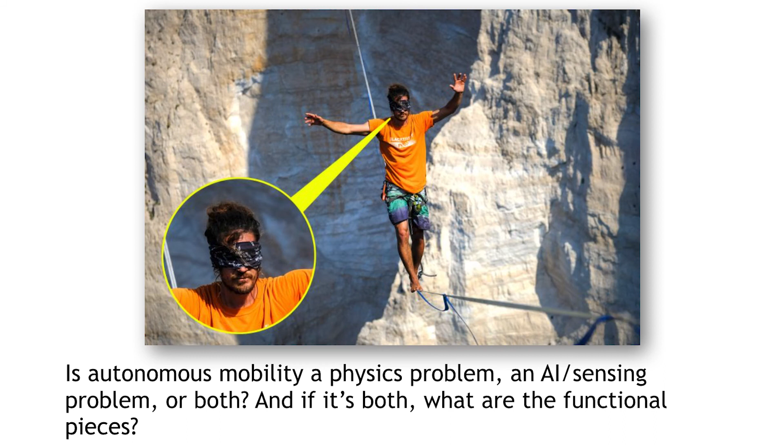If you think about this system though—this gentleman has wisely decided it would be good to blindfold himself before slacklining across this canyon, and has taken the interesting step of removing sensing from the equation other than proprioception. Clearly, you can do very complex locomotion tasks like this without having a perfect map of the world, because you can blindfold yourself and intentionally delete the information. So that kind of asks the question: are high-level cognition and mobility separate problems? And as any good talk has, there's no actual answer here, but I want to talk through some of the issues.

On the other hand, if you have a world-class athlete like Edwin Moses, who won a number of track and field meets back in the early 80s, back to back to back, that's not really a separate problem. You can't imagine a case where an Olympic-class hurdler is really able to remove the cognition and planning from the mobility of the manipulation side.

And there obviously is a spectrum here. So you can have machines that are more on the pick-and-place end that have very little in the way of active AI, or systems that are purely AI-based.

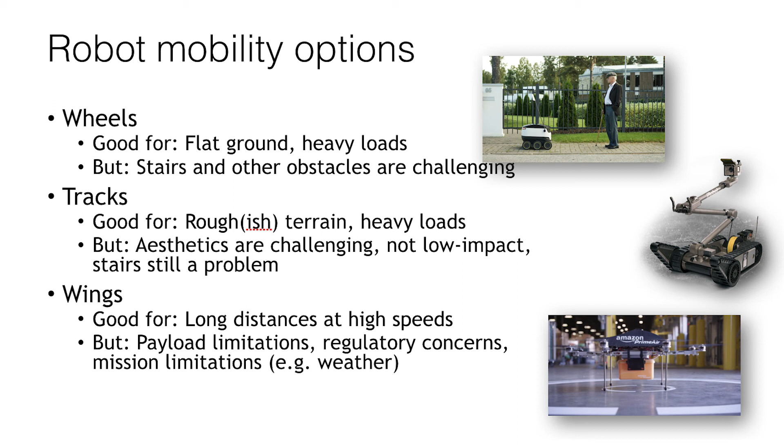In terms of legs, legs in general are very good for human environments. As a consequence of us having legs as much as anything else, I'm sure if we had evolved with wheels, our environments would be good for wheels too. So people have asked us, well, why bipeds? And the answer is, well, there's obviously a spectrum here too of the number of legs that you can have. So RHex, which is a fairly well-known early legged machine, had 6 legs, had the nice feature of being statically stable.

Where it starts to fall apart a little is in a paradigm where you're interacting with people. If you imagine a package delivery task at a business where the expectation is the package ends up on the counter, you end up having to add additional manipulators onto the back of it—like the arm that Spot Mini has, in order to reach the counter. Whereas with a biped form factor, you end up with the manipulators at approximately hip height for a human.

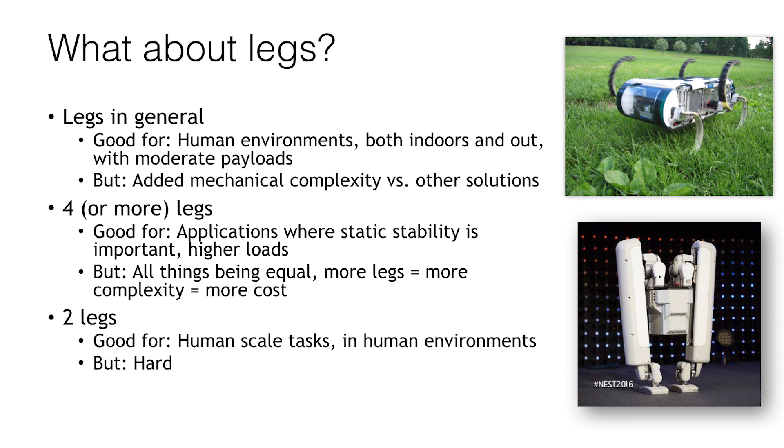I'm not trying to point fingers and say this is a terrible way of doing it. The idea that you would directly actuate each joint in the robot is an intuitively relevant approach. So the idea is, if you look at people, you can identify all the degrees of freedom on someone's arm and leg, put motors in each spot, and then control it.

If you had a magic actuator, that would work fine. The problem, when you address the physics of this, is that as you place mass distally—either on your arms or your legs—you end up with big pieces of inertia waving around along with the limbs. If you're trying to do low-cost educational robotics that's not particularly dynamic, and instead trying to give you active control over all the degrees of freedom of the robot—fully actuated as opposed to under-actuated or over-actuated—then that's an appropriate choice.

The problem is, as you start to get into dynamics, it would be a lot like having the car engine out there spinning around with the wheel of your car. It's a huge waste of inertia—you have to accelerate and decelerate it as you do the movement.

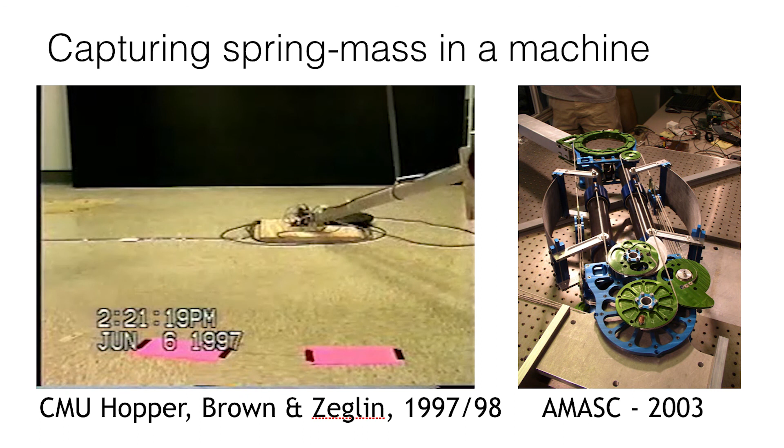Lots of people over the years have tried to capture spring mass motion in a machine. This was work that Ben Brown and Garth Zeglin did at Carnegie Mellon in the 90s, called the CMU bow leg hopper. Videos of that are available on YouTube.

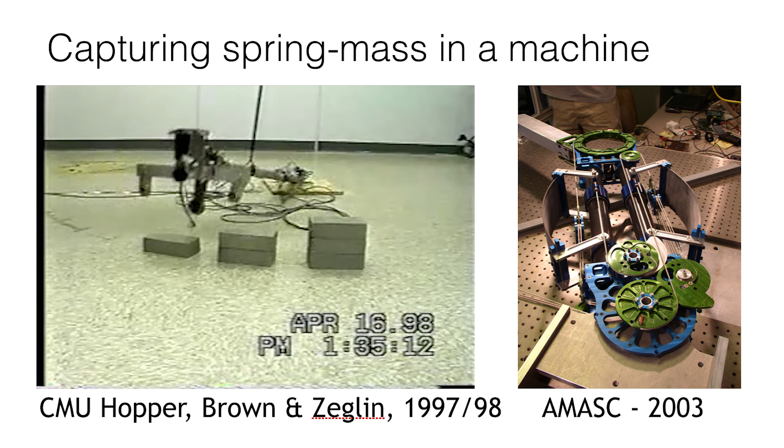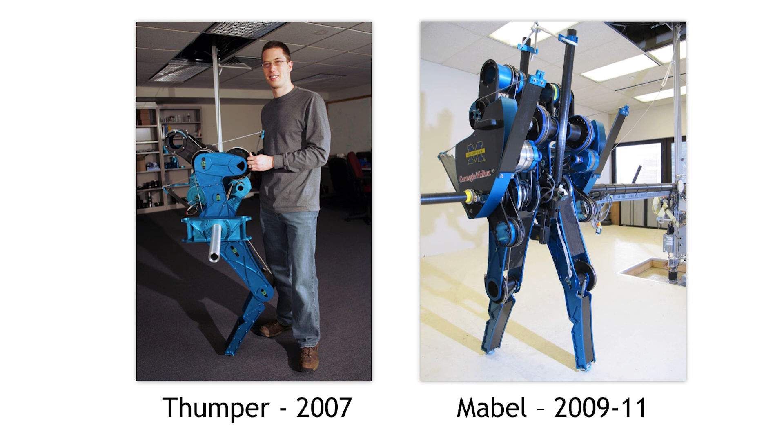This was the initial origins of the Cassie robot. This was Thumper and Mabel. You may be familiar with the Mabel robot from University of Michigan. Thumper was essentially one half of a Mabel.

There was an NSF project that built 3 legs. 2 of them were combined together to form Mabel, and then one of them was Thumper.

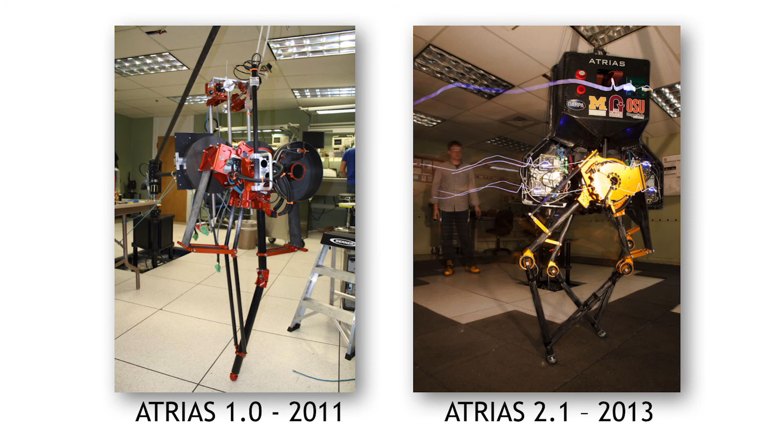That evolved into ATRIAS 1.0, work that was done at Oregon State University. That was up to ATRIAS 2.1 by 2013. There were 3 copies of this: one at Oregon State, one at University of Michigan, and one at Carnegie Mellon.

That was Jesse Grizzle at University of Michigan and Hartmut Geyer at CMU.

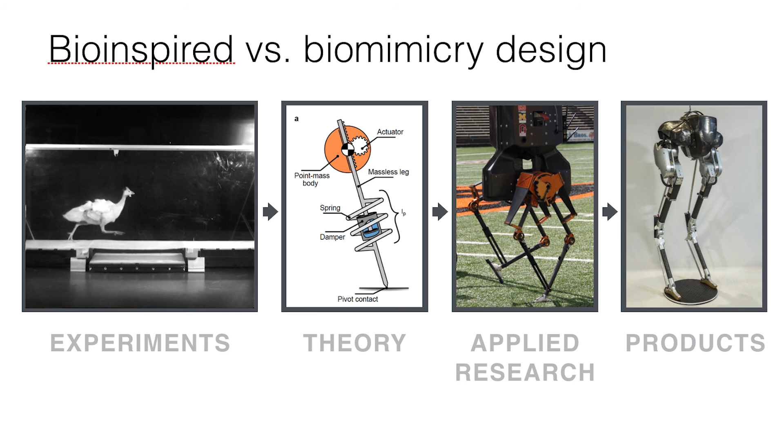Now this gets into the topic I alluded to, which is: are we intentionally trying to make machines that look like the animals? In this case, no. The starting point here is, of course, animal experiments, because that's our best reference for bipedal locomotion. That goes into a math model, which turns into an engineering project, in this case the ATRIAS project, and is then turned further into a commercial product, which is Cassie.

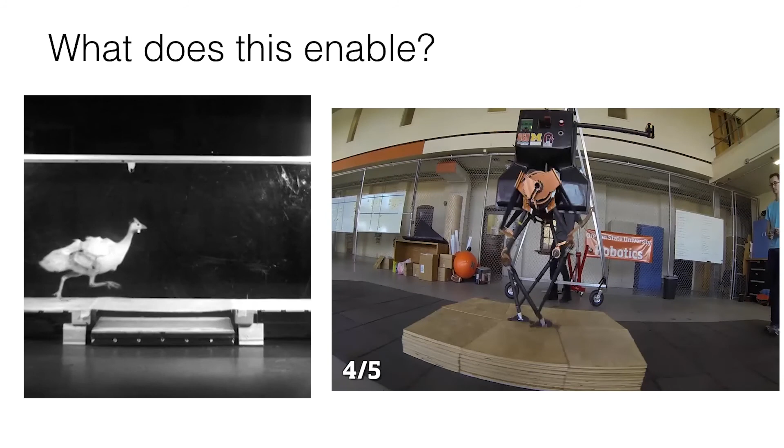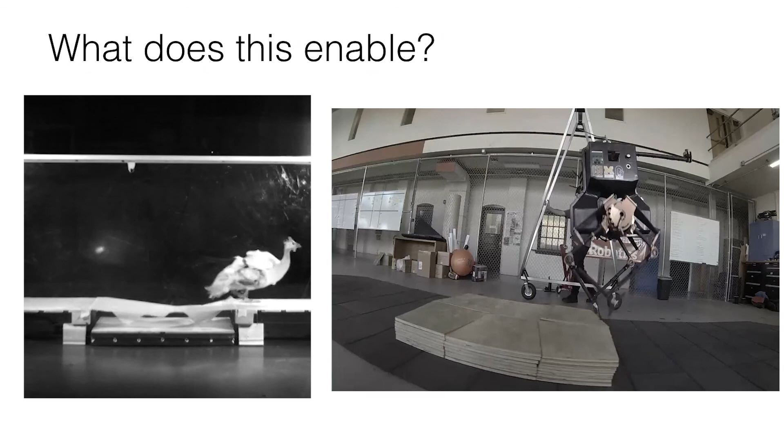This enables a couple of things. If you compare these two videos side by side, the bird on the left-hand side has no idea that it's running down a runway and is about to hit a piece of tissue paper. It was trained to run down a runway while being chased by a grad student. And what it's doing here is punching through the tissue paper.

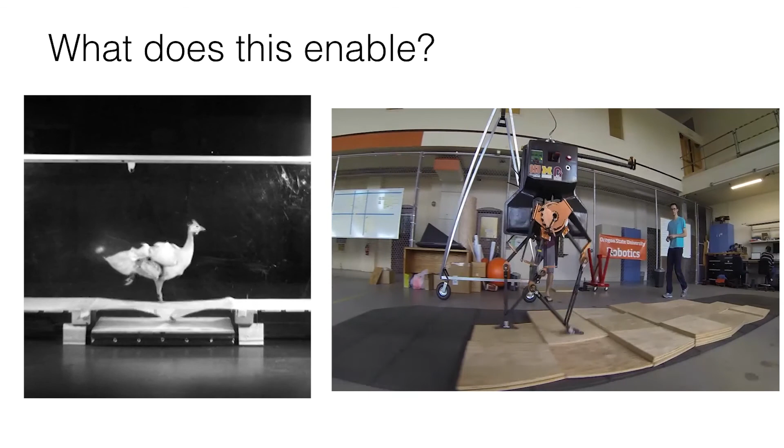If you actually look at the neural response time in biology, there is no active control that's fast enough to catch that leg behavior. So what's going on here is primarily a physics problem that's kind of baked into the hardware of the robot on the right-hand side, or the bird on the left-hand side.

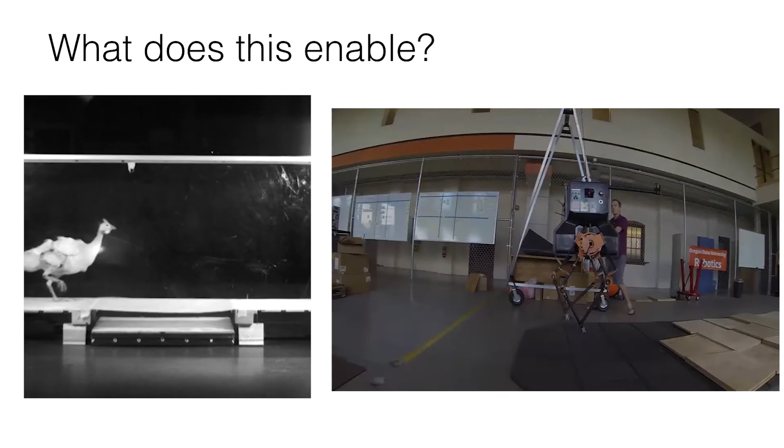And ATRIAS exhibited very similar behavior.

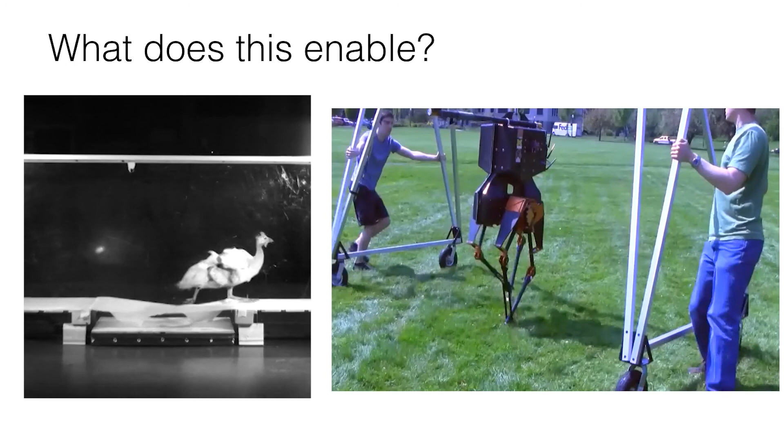This version of ATRIAS here had no sensing on it at all. It was unaware that it was walking, in this case outside or on those steps, and was able to sort of stumble and recover based on the physics of the gait, as opposed to 3D scanning the environment, having a plan of where it was going to place its feet, and so on.

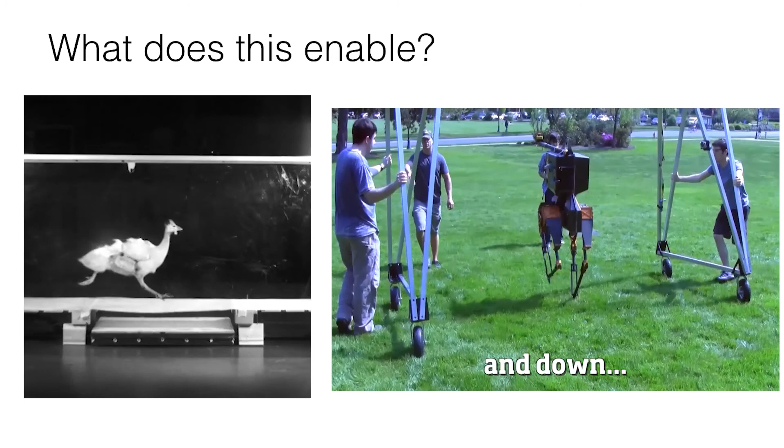So that suggests that, qualitatively, because we can see similar behavior here between the bird and the robot, maybe we're heading in the right track in terms of what portion of this is software defined and which portion is mechanical defined.

The problem here, though, if you think about this from a product standpoint, which is what we're interested in as a company, is that ATRIAS was pretty far from our product. It had no ability to get up after a fall and would frequently tear itself to pieces when it fell sideways, with actuators coming out the side and a very heavy upper torso. It took a lot of engineering work just to keep the machine alive, much less have it be a useful product.

So in 2014, this is sort of where I first got involved in the early stages of what became Agility. The university proposed a design concept for DARPA that they were calling at the time Silent Runner, and this evolved into Cassie in about a year and a half after the beginning of the project.

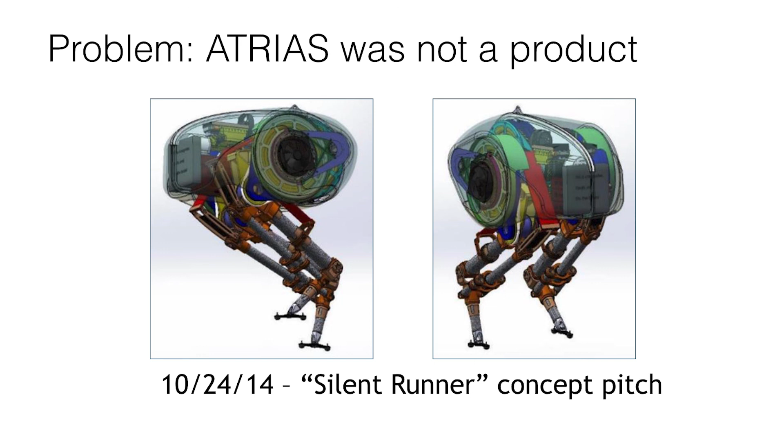We got involved as a company formally in 2015. I spent the first year of the existence of the company working out the license agreement with the university. We took an interesting approach with our seed investment, negotiating a lot of it in 2015, but because it would have just spent money on legal fees and not building robots, we chose to defer all of that until November of 2016.

We moved at a pretty quick tempo after that point. The first robot sale was to the University of Michigan in 2016, and we started shipping them the following summer. We then closed our Series A here just a couple months ago with Playground Global as the lead. We currently have a total of 14 employees, with 3 of them starting in the next 5 weeks.

12 of those are at the main office in Oregon, and we're also opening an office in Pittsburgh in about a week and a half. We just signed a lease on that. Conceptually, the split is that business development and software is in the Pittsburgh office, and electronics, mechanical stuff, and robot construction is in the Oregon office.

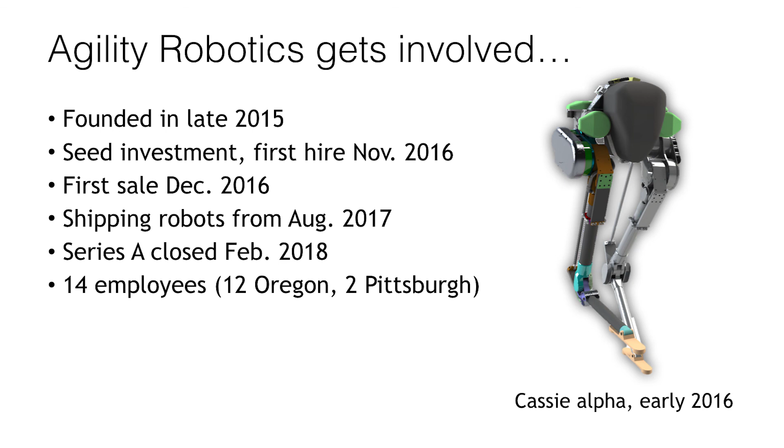I'm not going to talk a whole lot about our pitch, because that's not the point of this talk, other than to observe that platforms are products in and of themselves. So we are not, for instance, getting into package delivery by ourselves. We're saying that you can have a mobility platform that, when you add features and infrastructure to it, becomes a delivery service. Or in the case of an automobile platform, you can take the same underlying technological platform and also have it be vehicle transport.

So a lot of people would look at these and consider this 2 independent markets. We say, well, from our standpoint, what we're choosing to focus on is the mobility problem, which is common to these 2 different end use scenarios.

A way to think about that with robotics applications is to compare iRobot and Starship. You can imagine a case where if you were delivering groceries to someone who didn't have a driveway - we go to the Outer Banks every year, and there are areas where you can rent houses that are only accessible by 4-wheel drive across sand. We don't have 4-wheel drive, so we don't do that.

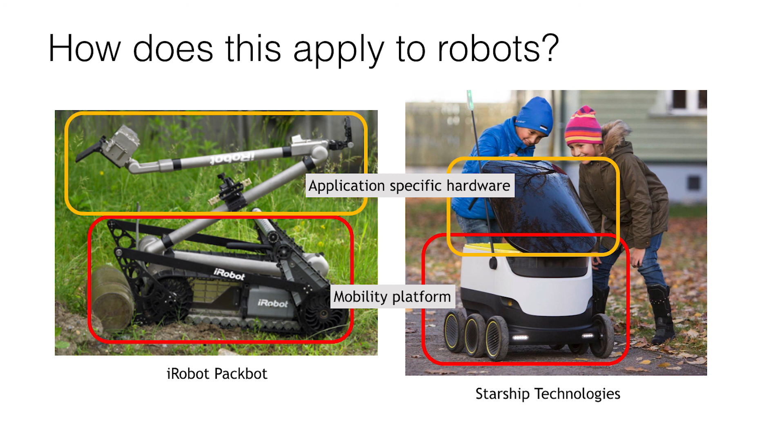But you could imagine that there might be a business model delivering groceries with a tracked vehicle so that you could access it across sand, or conversely doing IED disposal in a strictly urban environment where wheels, for some reason, are a superior platform. So we're trying to emphasize the separability of the application-specific design choices that are made and the mobility platform itself.

So we launched the robot in February of 2017. We allowed ourselves to be scooped by the university - we had intended to stay quiet about the existence of the company until that summer, but they were trying to do a president's address feature showing collaboration and launch of startup companies. As you can imagine, there's not a huge number of robotics startups in rural Oregon, and so they decided to use us.

Now, the nice thing with that is they have an extremely professional PR department and produced this video. So this was the university Cassie robot. This was, for counting purposes, what we call Cassie V1. I suspect the sound's on the computer side, but I'm not going to push my luck with PowerPoint misbehaving.

And the design choices here, there was a little chin on the front of it that's not present on the commercial versions of Cassie. That was to hold a laser gyro that ended up not being necessary, that ended up being overkill for our application.

Cassie V1 was assembled at the university, but all following Cassies that exist have been assembled at the company. All of the manufacturing is done in-house in Oregon. We do have a network of machinists that are local that we use.

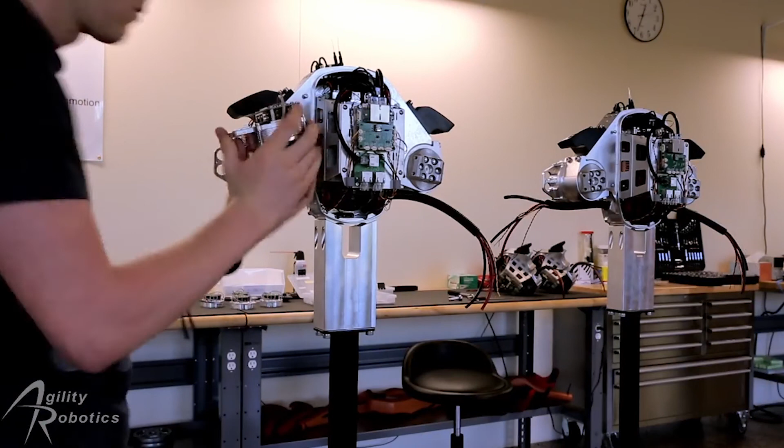We had been stuffing the circuit boards ourselves. I encourage any startups to not stuff the circuit board yourself, just hire a contract manufacturer to do that. And then other things that we get outsourced.

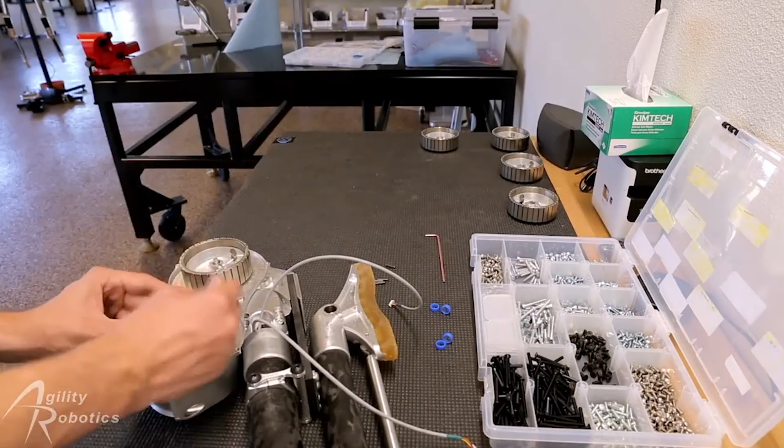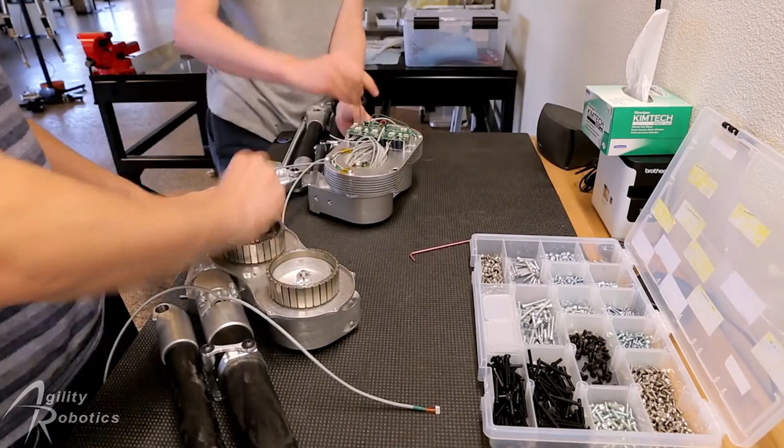Another thing I would encourage is if you're needing to build specialty batteries—and we had a very particular need for being able to pull current out of and put current back into the battery on very short timescales—that was initially designed by us, and then we started working with a contract battery house to optimize the design. But other than that, all of the assembly and testing is done in-house. Obviously, as we would scale, we would push this off to contract manufacturers first for sub-assemblies and later for finished robots. But at least for right now, it's been a huge benefit because it allows us to iterate pretty quickly.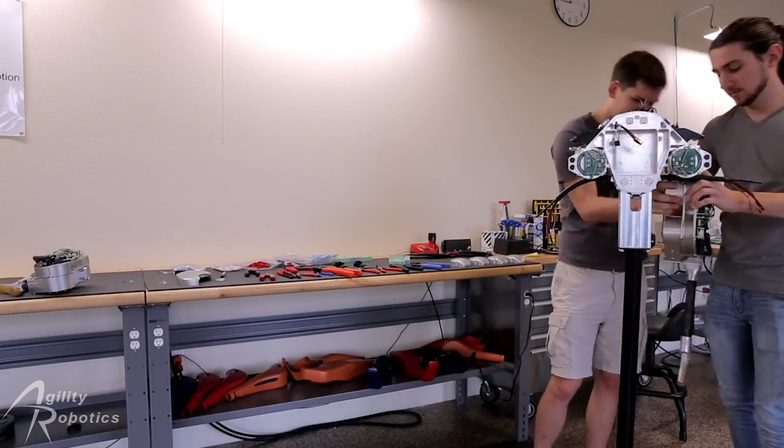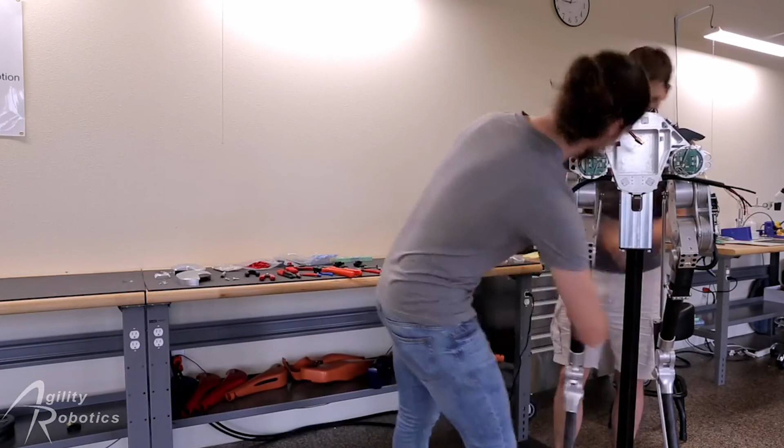We also adopted a hiring practice where all the engineers that we bring in first have to work with our technicians to learn how the robots are built and eat their own dog food. Because when an engineer designs something, they can, in some sense, wash their hands of the assembly process. By forcing them to go through the support side of things and the construction side of things, it adds a lot, I think, to our workflow in terms of maturing the design.

So these were the first three robots. That was University of Michigan, Caltech, and Harvard. I can say their names now because they've all tweeted about it.

We have another three robots actually that were just delivered. The first one of that batch was delivered last week, and the next two are coming up here. They have not announced it publicly yet, but there'll be a total of 6 customer robots that have been delivered, with the next production run starting shortly here. So those were the launch customer builds.

So that was Cassie version 2 on the far left, which was sort of the intermediate version transitioning away from the straight research platform, and then 3 of the first production runs of Cassies.

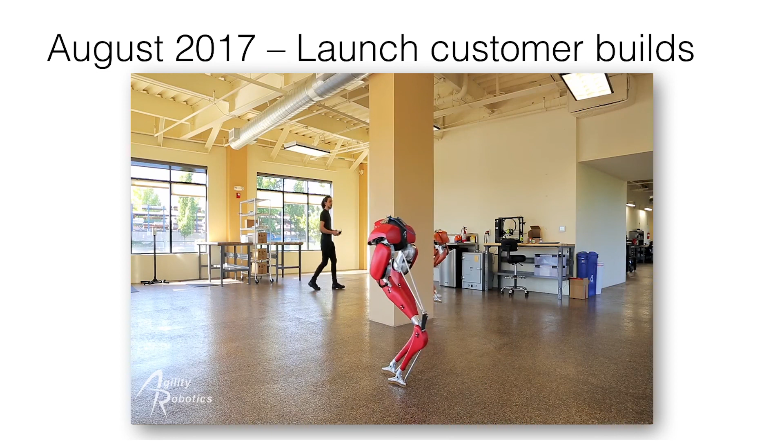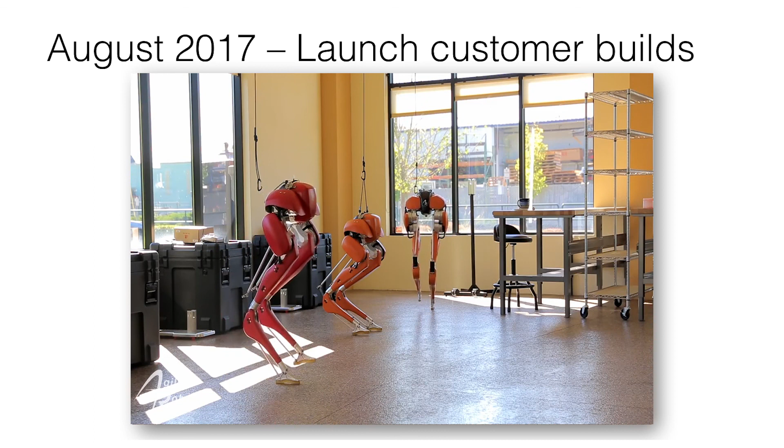So here's 2 of them wandering around our office. People ask, is the robot right now autonomous? I'll get back to what that means, because it's actually a more complicated question than you might guess. Right now they're teleoperated, but they are teleoperated with intent rather than with marionette puppeteering kind of things.

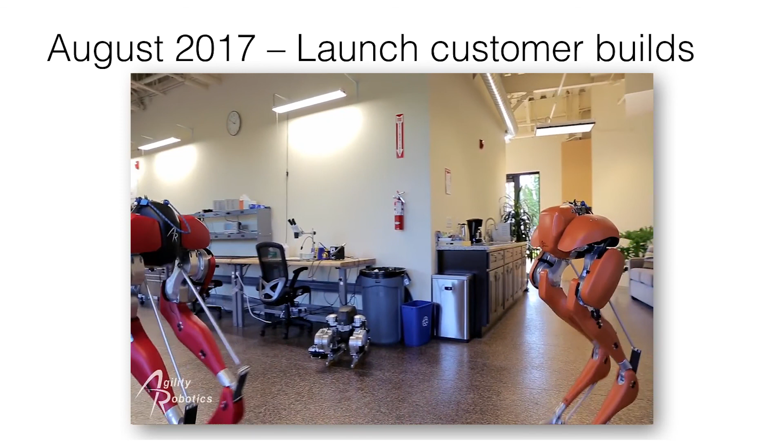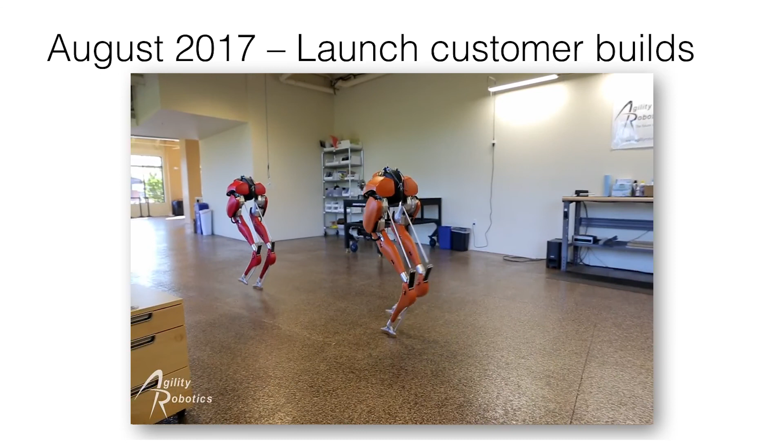So although you'll see in some of the videos, some of the remote control units standing behind the robot, they are sending abstract commands to it: walk forwards, turn left, turn right, squat down, stand up—not sending commands that are directly applied by the robot to the motors. So differentiating, say, between a radio controlled car where you're directly controlling the current that's going to the motors on the wheels versus the link here simply projecting a little command to the robot, or whispering in its ear saying it's time to walk forwards. And that is a lot more amenable to the AI stuff that I'll talk about in a second.

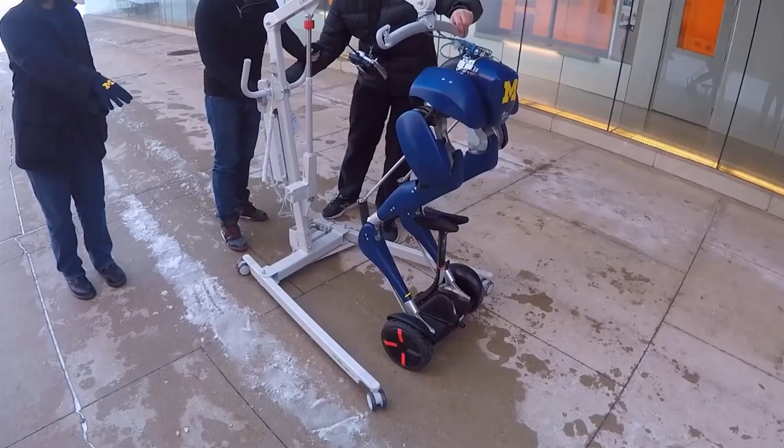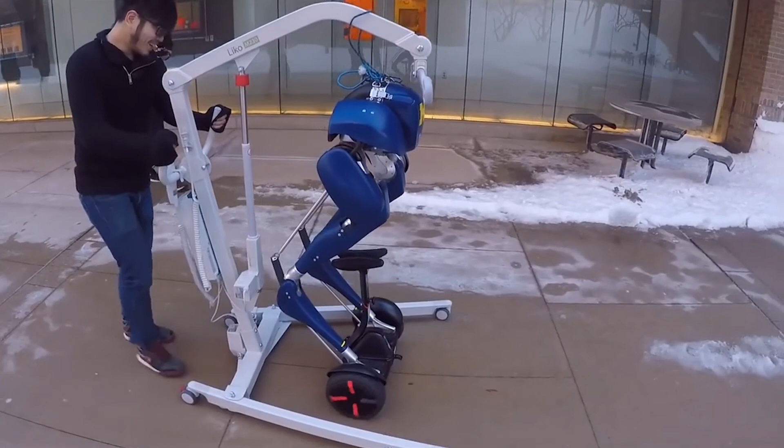What's interesting about this is that nothing about our design was meant to allow the robot to ride a Segway. It's simply that the robot can balance and it understands how to lean forward and lean back and maintain its center of gravity. So in this case, because riding a Segway is just about standing and shifting your weight, your center of pressure on your feet forwards and backwards, they were able to get it to ride a Segway with very little modification.

More interestingly, I can imagine myself doing that because I've ridden a Segway once. This I'd be personally a little bit more skeptical about. But again, at fundamental purposes it's simply a balancing operation where by keeping yourself posturally upright, you can solve the balancing problem in a way that is very similar to how a human does it.

So the most recent news from a business development standpoint was that we wrapped up all of our Series A in March 2018. This is public information, so I'm not saying anything super secret here. The investors were Playground Global, which is Andy Rubin's fund that he started after leaving Google, Sony North America, and one of our seed investors, Robotics Hub from Pittsburgh.

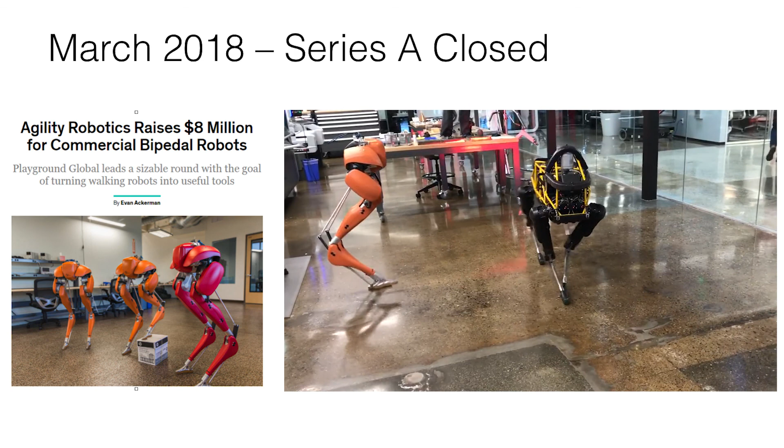While we were at Playground, Cassie got to meet Spot. This is, I think, an interesting side-by-side comparison between quadrupeds and bipeds. But they had fun together.

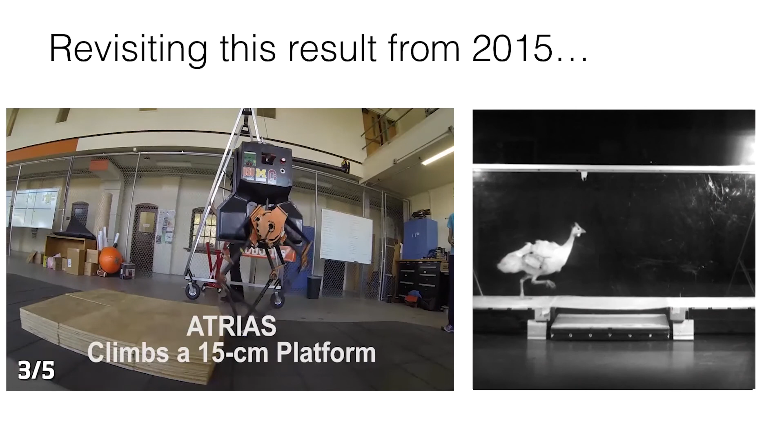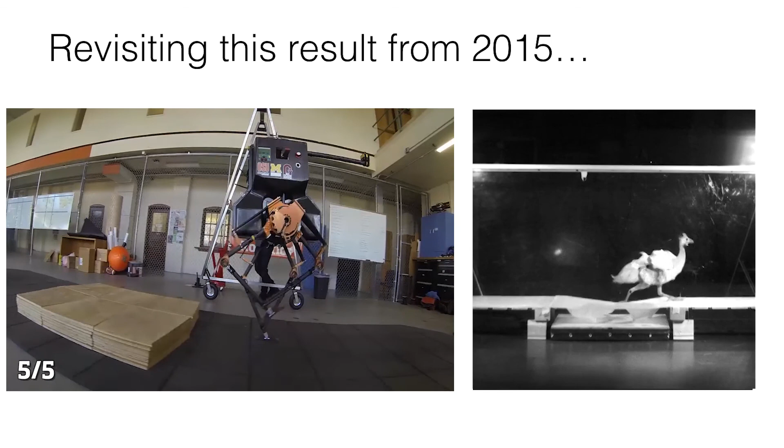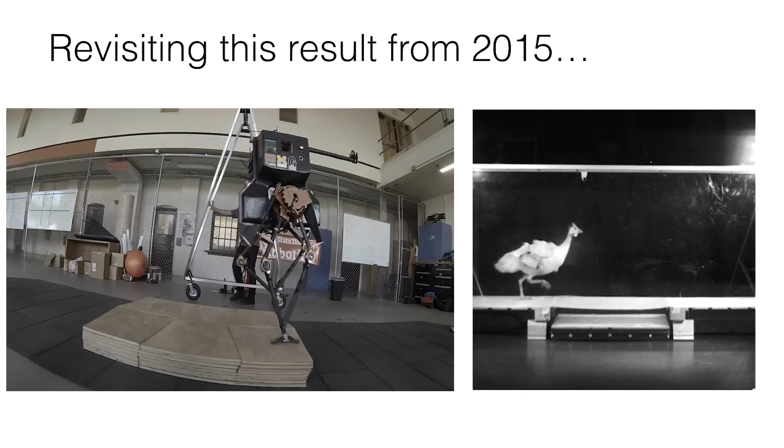All right, so revisiting this result. We got here with ATRIAS in 2015. One of the interesting side effects of the ATRIAS leg design was it removed a lot of the mathematical complexity. With the 4-bar linkage, it canceled out this elbow and this elbow, so it allowed you to actuate directly along the axis of the leg, which is a lot closer to the SLIP model of actuation.

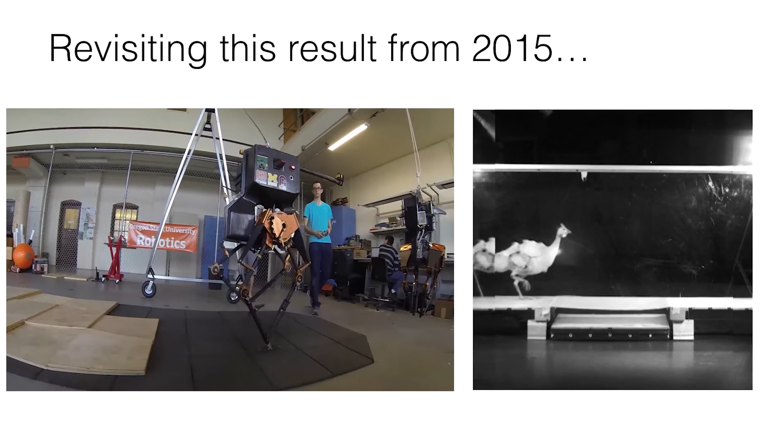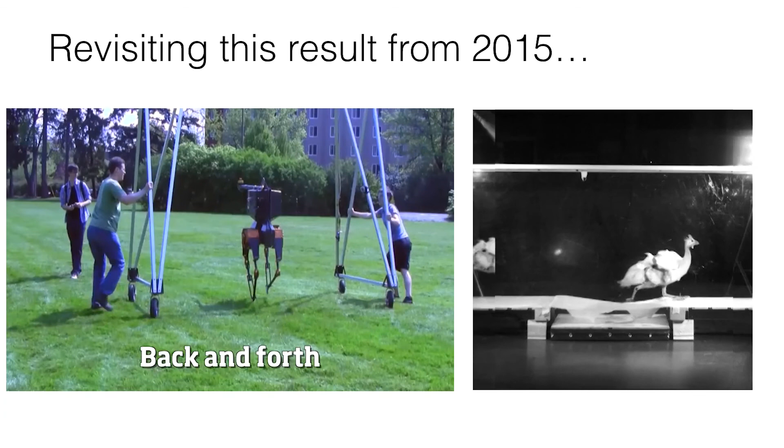And that ended up being a lot harder with Cassie than we expected. Cassie has a knee, so when you pull in one direction, there are components of the resulting vector at the toe that end up going in a direction that's not along the leg length direction. For about the last year, that was a source of a lot of added complexity.

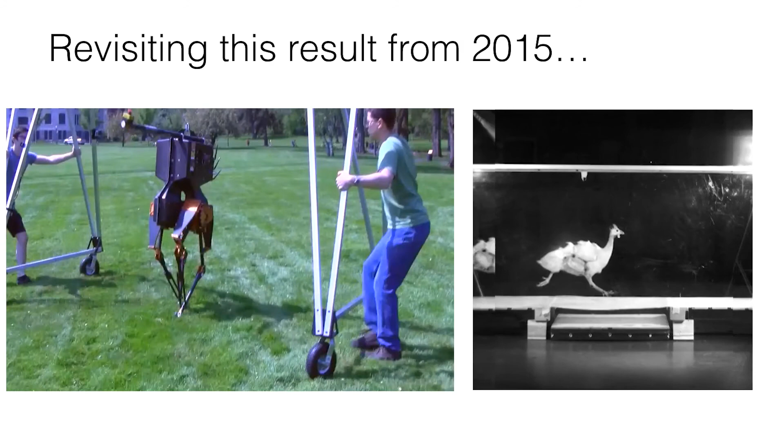So Mikhail, our lead controls engineer, started a project about a year ago taking apart the original controller design and rebuilding it from scratch. And I'm pleased to show you today, we have not posted these videos yet, that it has paid off.

So this is Cassie walking at speed, blind over steps. Again, we're not to the point yet of being able to graft a whole lot of world perception on top of this, and I'll explain why that's necessary on the next slide.

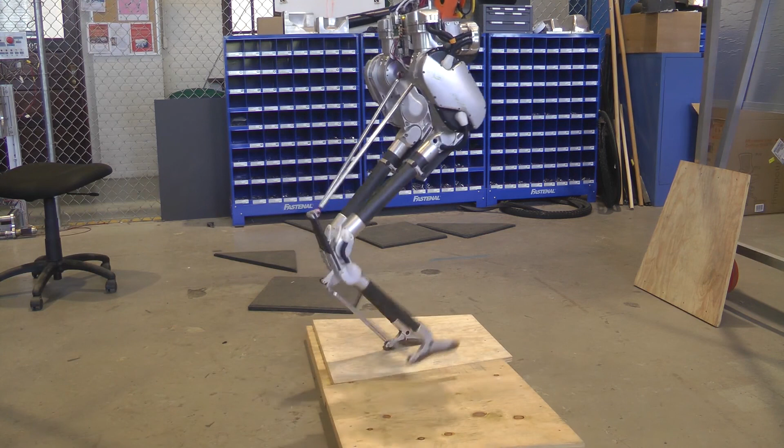But this does show that by not having to stop and think deeply about where you're placing your feet, you can maintain the motion. Also, because the robot simply perceives this as a postural problem rather than a controls problem per se, you can see it's able to treat this as a sidestepping behavior in addition to a forwards-backwards behavior. So the same control algorithm that works walking forwards also works from a sidestepping standpoint.

And we think this is the first time that a biped has walked at speed over steps. It's a claim that I would want to research before I firmly stick a stake in the ground. But that's an interesting result, and that was actually just from last week.

All right, so what about autonomy? That's great if you're indoors in a relatively controlled environment. Where this breaks down, interestingly, and there's some work with gait research from humans, is that we plan about 2 or 3 steps ahead, not much farther than that, and the behavior in a lot of applications is actually dominated by the clockwork physics behavior of your legs up to a point.

In other words, if I'm trying to climb steps, I can approach the staircase, set my gait frequency, and then proceed up the steps without thinking about it a huge amount. Where that goes wrong is something I'm sure everybody here has experienced, which is you're going down a flight of steps, usually carrying something so that you can't see the bottom, and you step down, there's a last extra step where you break your kneecap.

And that's illustrating the disconnect between a clockwork physics-based approach and a more robust approach that includes some planning knowledge. So just to illustrate that with Cassie, using our simulator, things go well and then not so great. And so this is why you need planning.

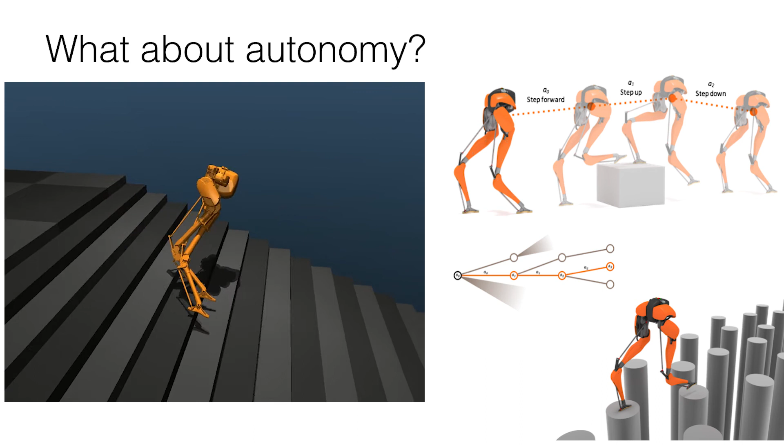So the robot knows how to do a bunch of things: step forwards, change its gait height, gait frequency, turn left, turn right. And the planning problem becomes planning through the kinematic space of those options, as opposed to inverse kinematicing back exact foot placements.

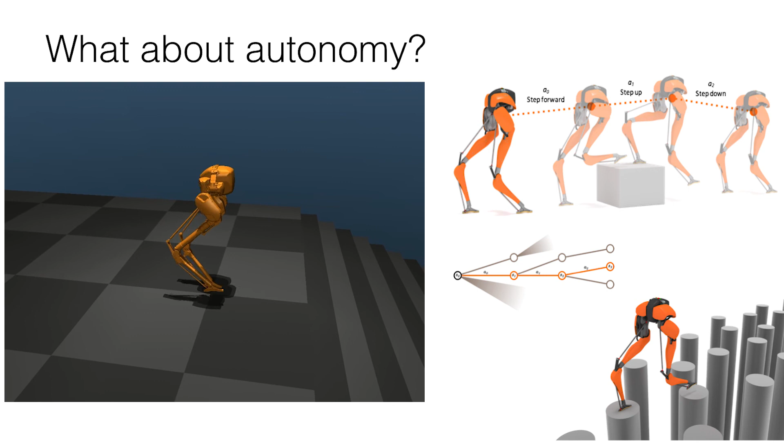So on the bottom right, we view the world as a series of stepping stones. Doesn't matter where on the stepping stone you land, as long as you can plan a physically plausible route through it. You don't have to obsess too much about the actual ground contact.

That's been implemented first in a simplified planning model, showing that by adding and removing energy from the gait, you can stutter step to set your gait and then hop down off of a ledge. The same behavior can extend to steps, where you set your stride frequency to a point that allows you to go up the staircase, and then you can kind of go from there for free after the gait is set.

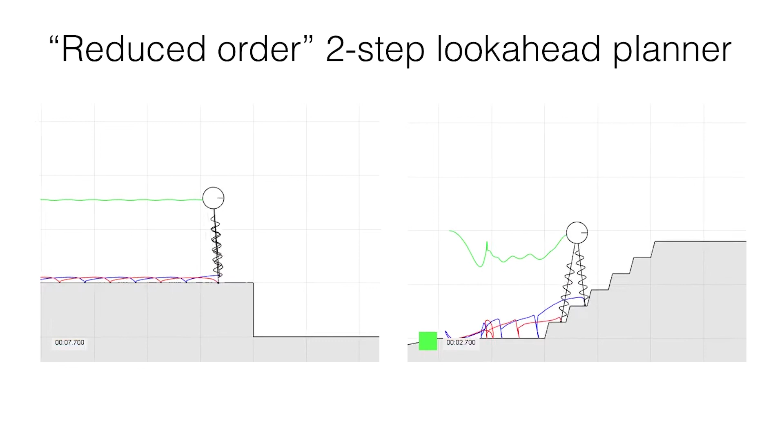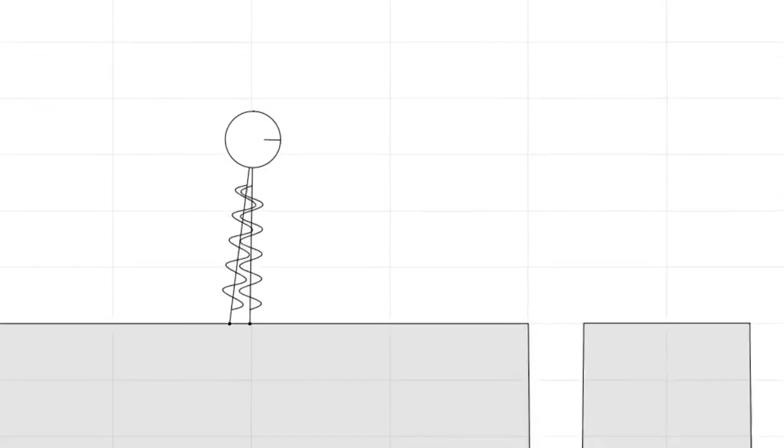For people who are interested in some of the technical background, this is actually a Monte Carlo search. Because we have this stable of behaviors we can pull from, the space we're trying to plan through is significantly more constrained than all of physics. If we had to include the option to leap up into the sky like Superman, or crouch down and walk like a duck, that's a hard problem to plan through. But the available options the robot ends up considering is actually relatively small.

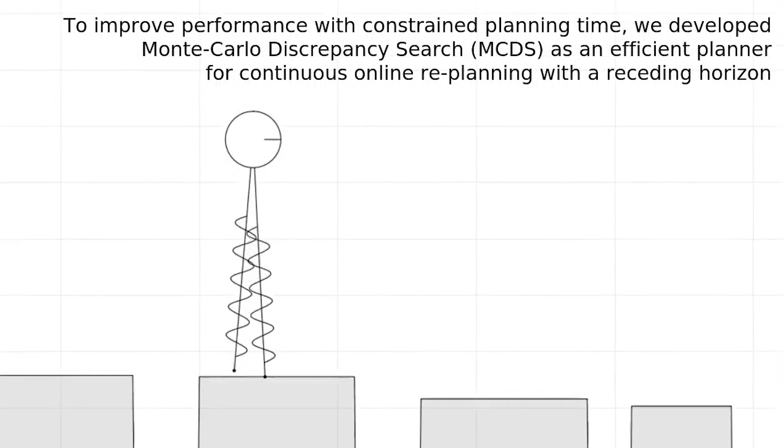So you'll see here, it tries a bunch of options, falls on some of them, and keeps walking on others. It just picks the one that allows it to keep going the longest, and then the planner updates the next step.

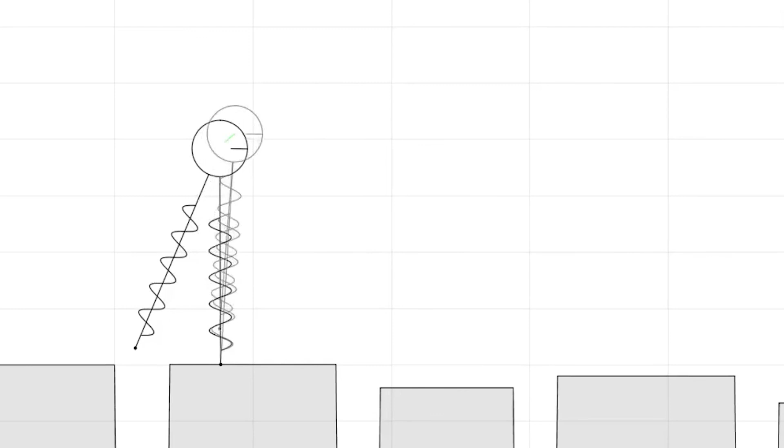So this is obviously kind of a toy approach here. Again, this is a very simplified controls model, but because the robot is designed to encapsulate this physics, it does extend pretty well. So the next part of this video shows the planner running in full 3D, using the same model that we actually use for controls development.

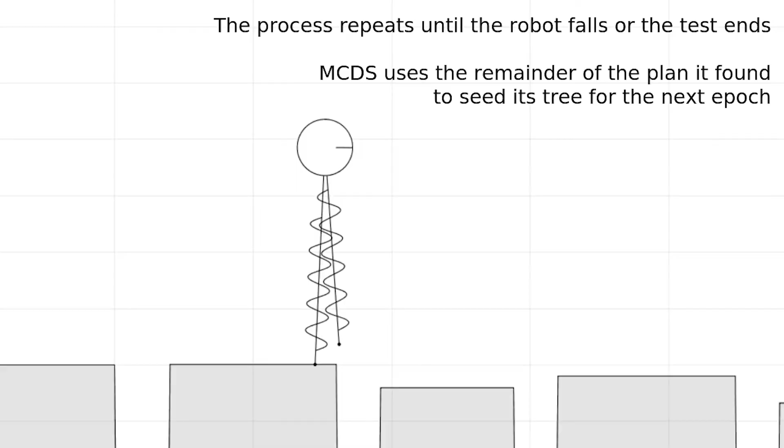But you can imagine this sort of problem being a relatively simple machine vision problem. You could solve it either with LiDAR or with real-time stereo. And the actual planner in this case is being forced to run hard real-time along with the control system.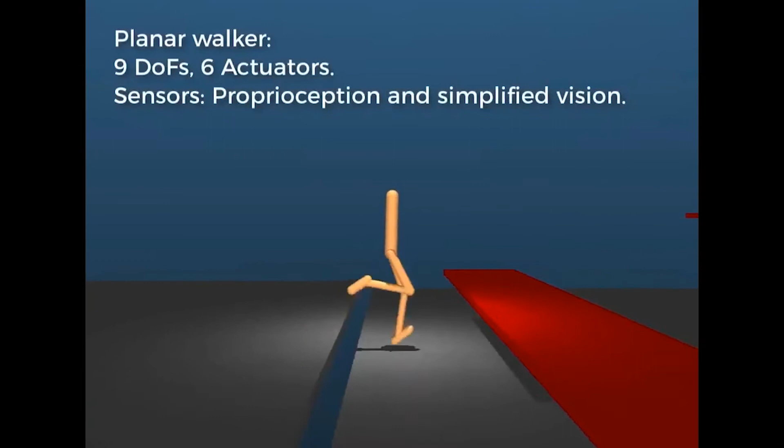Okay, so what about deep learning? I'm sure most of you are familiar with this video. This was from Google DeepMind's grafting deep learning onto a biped. Earlier in the video, there's a bunch of pretty humorous clips that I did not include, because I'm not trying to make fun of their results.

This was showing that with a physics system, there are learning approaches that result in something that's a bit like what you would expect from a bipedal system. We're taking very early steps with that. This is work that was done at Oregon State, and also a collaboration with UBC. This is also a video that was actually just released yesterday at Dynamic Walking in Florida.

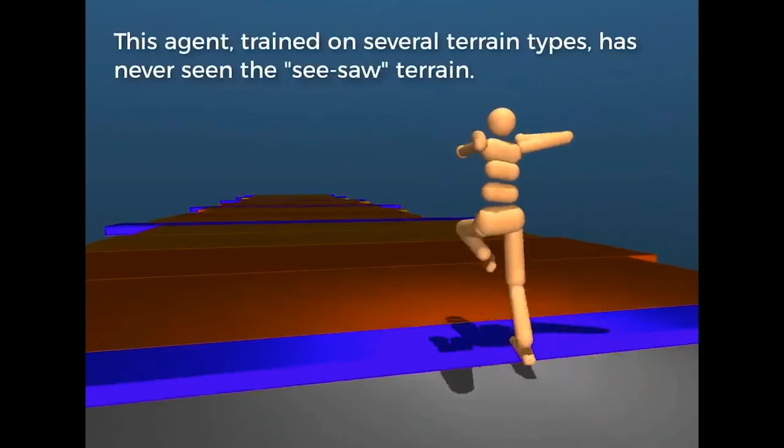Now, the real world, and I'll talk about this on the next slide, is probably a combination of the two, and there's good evidence that people behave this way. A lot of your behavior at the quote-unquote unconscious level is either strictly physics-based, based on the geometry and physics of your legs, or extremely low-level neural stuff, so spinal cord and down in terms of the reaction. So there's not an either-or situation. You might need both deep learning and the physics-based controllers, which leads to this.

We like to think of there being 3 levels of controls, and then a 4th level being physics in terms of what defines the behavior of the machine. Layer 0 is the physical hardware, layer 1 is the really fast control loops - from a controls engineer perspective, these run at 2 kilohertz, super fast, tight control loops. Layer 2 is learned motor strategies, like knowing I need to adjust my gait frequency slightly on steps or I'm going to fall down. Then high level planning is knowing I need to go up the steps - understanding intent and mission goals.

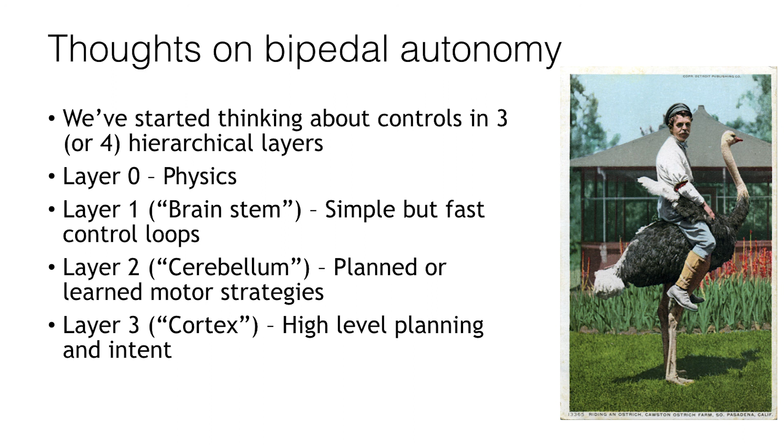How you might map this onto automobiles - the analogy is imperfect but useful - is that the physics of the car occurs at the design level: how the engine works, how your cylinders get fuel. Fuel injection is knowing how to feed fuel to the engine and how much to give it - that's a tight control loop monitoring the oxygen sensor in your tailpipe. Layer 2 is when the car is in a slide - how do I chatter the brake system so the car straightens back out, for anti-lock brakes. Layer 3 is self-driving. What's interesting is that the self-driving revolution arguably requires all of these layers to exist. If you had an old school Model T, making it self-driving would be a hard problem because you can't just abstract the AI away from the control system.

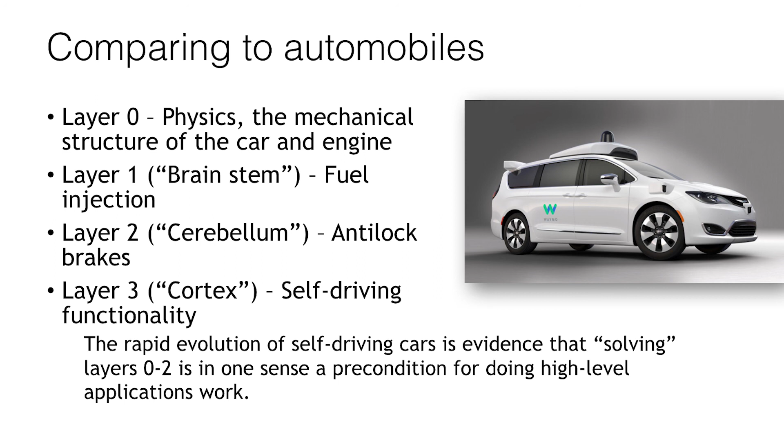We're trying to think of this as a similar issue - right now we're selling to controls theorists who are mostly interested in layer 0, having a robot that's mechanically able to walk. By the time we're at our next product launch next year, we hope to be selling to people who are starting to think with applications engineering goals in mind, so AI developers - in other words, ignoring the things required to posturally keep the robot upright, and instead worried about control from the standpoint of using this as a mobility platform, less as a cool bipedal robot.

We expect that most customers actually want to use the robot at a higher level, not at those lower levels - you can simply imagine yelling things at the robot you're riding: go forwards, and it knows enough not to fall over the curb, not to walk into traffic, and so on. A lot like the analogy of this very dapper gentleman from the 20s riding his trusty steed. In other words, we'd like to be the ostrich, and give you the pleasure of riding - not literally, we're not offering Cassie rides yet.

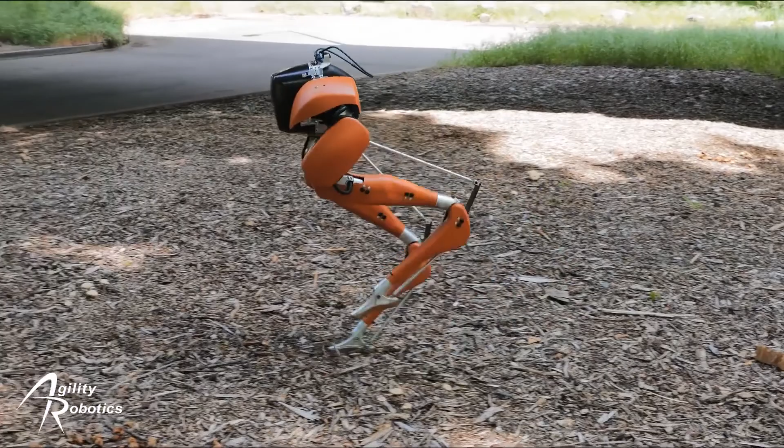To show you a video of where we're at - this hasn't been released either. This shows what we can do outside now, crossing different terrains. This was about a 5.5-minute continuous walk, obviously edited down quite a bit. All of the behavior here with ground contact, showing transitions across surfaces with different stiffnesses, is simply baked into the robot. This is heading toward having the robot simply be an abstract platform available to customers, as opposed to requiring you to be a legged robotics expert. Let's let this run for a second - there's a particular spot in this clip where it steps on a root growing across the path. Again, we're not 3D scanning the environment and planning for those disruptions - that's simply baked into the control system.

That'll be online - I'll let you watch the whole thing at your convenience.

Some hard problems with this: e-stop with a legged platform is an interestingly undefined problem. With a car, if you imagine self-driving, e-stop is frequently max brake effort - let the anti-lock brakes and vehicle stability control keep you going straight and stop you as quickly as possible. It's not clear what slamming on the brakes means for this guy. Certainly you don't want to turn his power off - that's a problem both for the robot and for anybody in front of it. That's something we're looking at right now. Our best guess, and I'd be interested if anybody has an idea, is that e-stop for a legged platform means reducing the joint torque limit significantly, so you're basically coming to a stop.

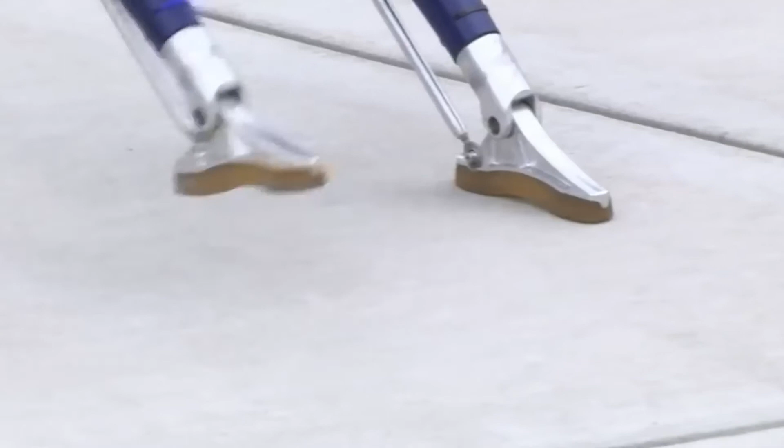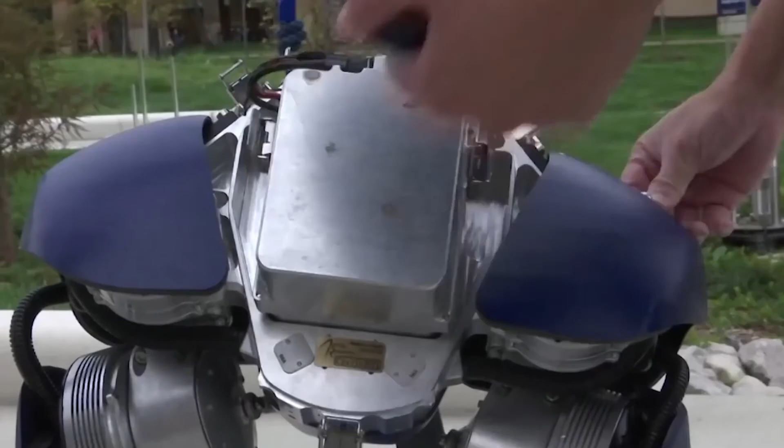The second problem is failing gracefully. I'll pick on Jesse because he loves to post these sorts of videos—this was actually footage the Associated Press took. It's been good advertising for us because our primary design goal for Cassie was don't break when this happens, and fortunately we've been quite good at this.

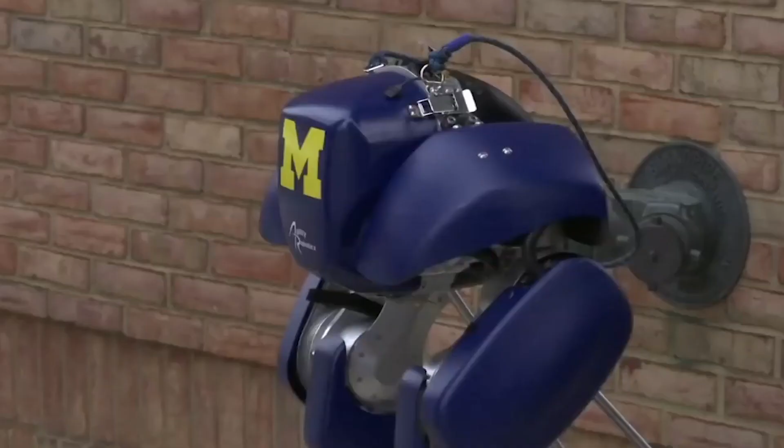So the question is, how do you recover from that? What would a person look like? Well, sometimes people don't recover from that, which is why emergency rooms do good business in broken arms. But from a robustness factor on the robot, after this happens we need to be able to get back up and survive the fall without damage. And as with the e-stop question, more importantly, don't hurt people in the environment or the robot, in that order.

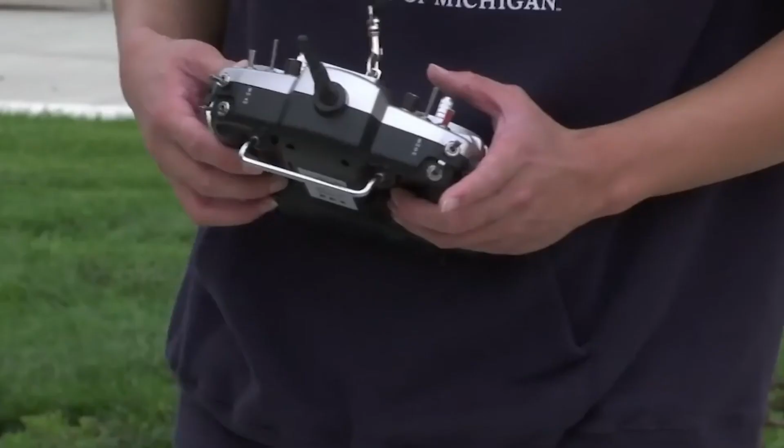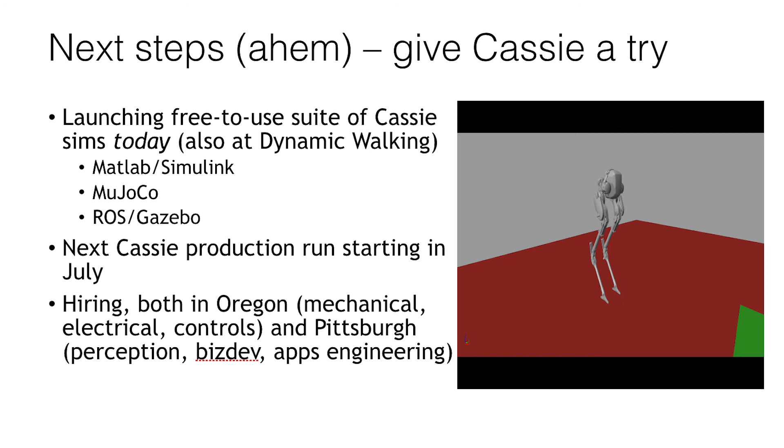We're pleased to announce today that we're releasing our sims available for public use under a BSD license. The first of the two is actually available now, from GitHub—that's MuJoCo. The one people are more familiar with is probably Gazebo. That's still under development, we're finishing that up, and we'll be releasing it in July.

So if you have controls ideas that you try, keep in mind that at this point this is intended for people who want to control the robot at a lower level—those sims are really for that audience, as opposed to people trying to graft higher level stuff onto it.

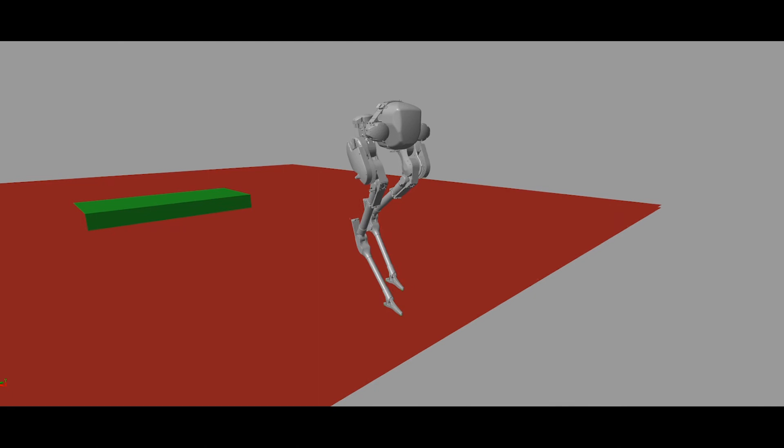But the video from UBC and Oregon State was done with the MuJoCo sim, so it's the same tool set we use internally to develop for the robot. One of those two tools is available now, with the next one coming out in July.

We're also starting the next production run here shortly. We're taking a month to reset, do inventory, and do some remodeling out in Oregon, but shortly thereafter we're getting back into building robots.